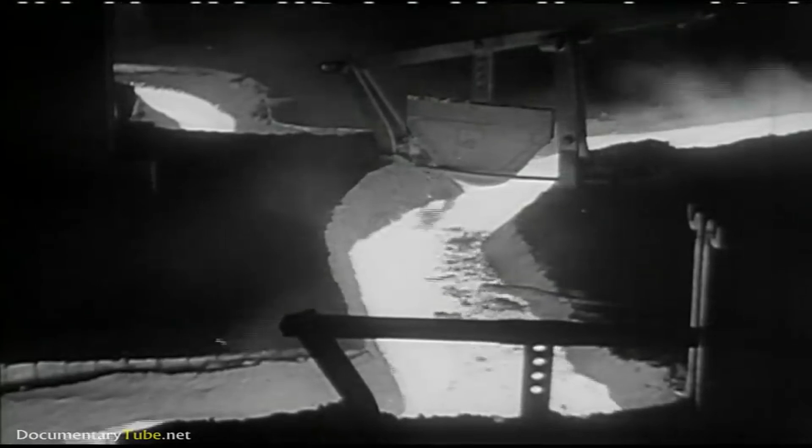Simultaneously and working in perfect coordination, other Chrysler men planned the layout of the arsenal building itself. Expending more than $200,000 of its own money for planning even before the go-ahead signal was given, Chrysler Corporation pushed forward this national defense job with all possible speed.

On August 15th, it was authorized to construct a $20 million tank arsenal and to build 31-ton tanks. A job had to be done, and Chrysler Corporation was determined to do it. In less than a month, first ground was broken for the arsenal.

Huge steam shovels, like fabulous monsters foraging for food, dug out massive chunks of earth to make way for deep foundations. Vast amounts of construction equipment, tractors, cranes, and graders arrived, and the excavations took on an appearance resembling a busy mining camp. Concrete, and still more concrete.

51,000 tons, most of it poured at temperatures near zero, went into the foundations of the arsenal itself, and into the especially deep foundations for extra heavy machinery, and into large floor areas and roadbeds for the railroad sidings which were to run into the factory.

Meanwhile, behind locked doors, preparation for tank production went forward. Army officers and Chrysler men, experts all, worked side by side to produce armament for America's defense. Working untiringly, production engineers designed the jigs, dies, tools, and machinery necessary for mass production. Other experts worked night and day to plan the most efficient plant layout. Uncle Sam had asked for action, and action he got.

Steel construction followed close on the heels of the foundation work. Fighting now against the bitter cold of a Midwestern winter, as well as time, hearts warmed to see the first steel upright swing into position, and willing hands quickly bolted it solidly into place. With the first steel uprights pointing slim, rigid fingers skyward, steel construction went forward at a record pace.

Steel, more than 13 million pounds of it. More than 20,000 large pieces went into the construction of the vast plant.

Ah, what's this? A bottleneck? We don't envy you the job of sorting those out, brother.

Cold, snow, ice, rain, nothing deterred the building of the immense structure.

Men, ankle and sometimes almost knee-deep in mud, worked with determination. Trucks plowed through to their destination, delivering their vital cargoes of supplies and materials.

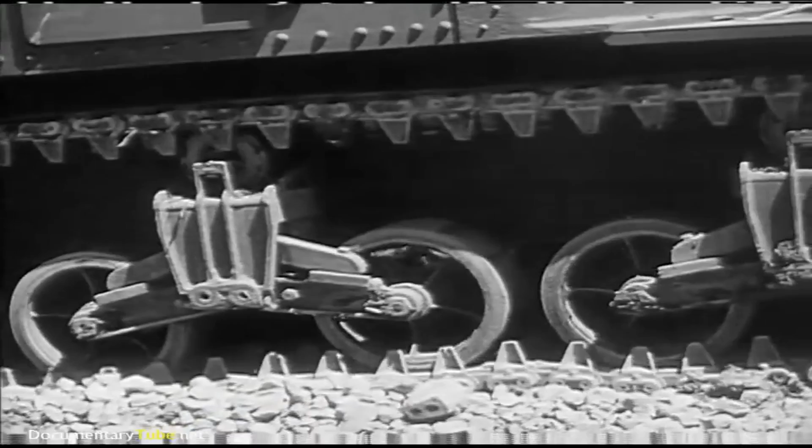Then came a red-letter day. In the presence of Major General E.B. Gregory, Quartermaster General of the United States Army, the official flag was presented and raised over the tank arsenal. Then on strict schedule, carloads of production tools and new machinery began to arrive at the arsenal, ready for immediate installation. More men, more materials, and still more speed. Bricks and mortar, steel and glass, and the vast skeleton of a building began to gain a more solid appearance.

With wiring completed inside the plant, men hurried to finish the flooring, while high above them, fellow workers rushed to weatherproof the roof. Another red-letter day marked the one-third completion of the arsenal. Ever mindful of their fight against time, production engineers partitioned off this one-third. Then, with the arsenal steel construction still to be completed, and with only this part of the interior temporarily heated by means of a locomotive, building of the first sample tanks went forward in earnest, and Uncle Sam's defense program began to assume definite, more tangible form.

Meanwhile, work on the arsenal itself continued at a rapid pace, while day by day, hour after hour, new machinery was moved in, according to a carefully coordinated plan, even as hundreds of designers, draftsmen, and engineers supervised the building and installation of more machinery for mass tank production from assembly lines of defense. Time was precious, and certainly none was wasted here. Exactly as planned, every huge milling machine, each giant multiple drill press, every single piece of machinery, large and small, had its predetermined foundation and location in the arsenal's layout.

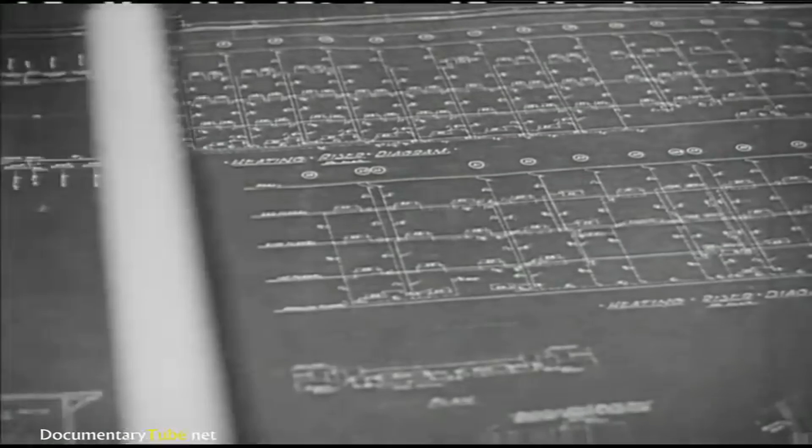Fortunately for America, the most important assignments in its defense program were taken over by industries skilled and experienced in scientific research. Moving at top speed, the National Defense Program benefited by the wealth of experience gained by America's number one industry over a period of years. The engineering and production skill that had given America constantly better and better automobiles and trucks for less and less money went into the planning and building of these giant tanks for America's defense. No time was lost in training skilled workmen in the jobs they were to do, as preparations for quantity production began to assume even larger proportions.

With the mass moving in of giants of modern industrial production came a myriad of small machines, literally hundreds of them, all tagged and clearly marked, each with its own important place in production, each with its vital job to do. More than 8,000 specially designed tools and gauges and fixtures were also to be installed before the arsenal would be completely equipped. The arsenal became just that in the truest sense of the word.

Strictest official secrecy was enforced. Incoming and outgoing men and vehicles were carefully checked and inspected. The race to produce the tanks, way ahead of schedule, was well underway. The full power of private competitive industry, its manpower, its resources, its facilities, was again proving its worth when turned to the job of America's defense.

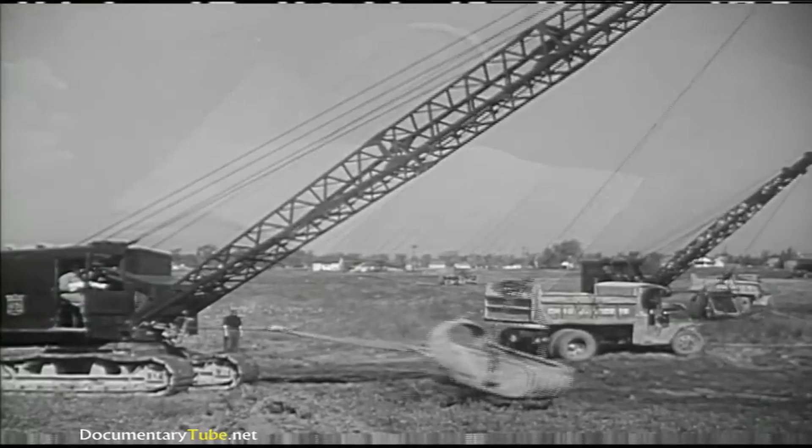Pride of accomplishment surged in the minds and hearts of the onlookers as the 31-ton giant was put through its paces. Here was a giant weapon for streamlined modern warfare. Swiftly moving walls of tough, bullet-resisting steel, able to move over difficult terrain at better than 25 miles an hour. Mobile, flexible, fast.

Military experts acclaimed these American Army tanks better than any similar mechanized war equipment, a mighty safeguard for our nation. General Wesson and President K.T. Keller of Chrysler Corporation watched the mighty moving fortress as, with cannon booming and machine guns chattering, fully ready for frontline action, nothing hindered its progress.

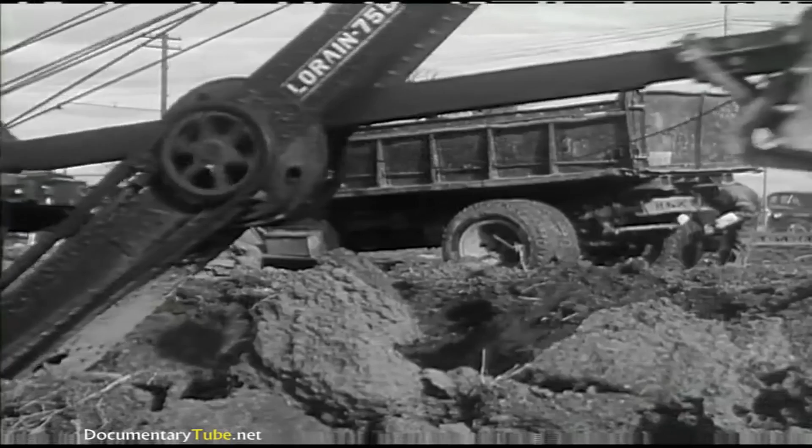Climax of the day was the unheralded appearance of the second tank, which had been completed that very day. American men and American industry had carried out the Army's order of the day and had taken a major step toward arming the country for defense.

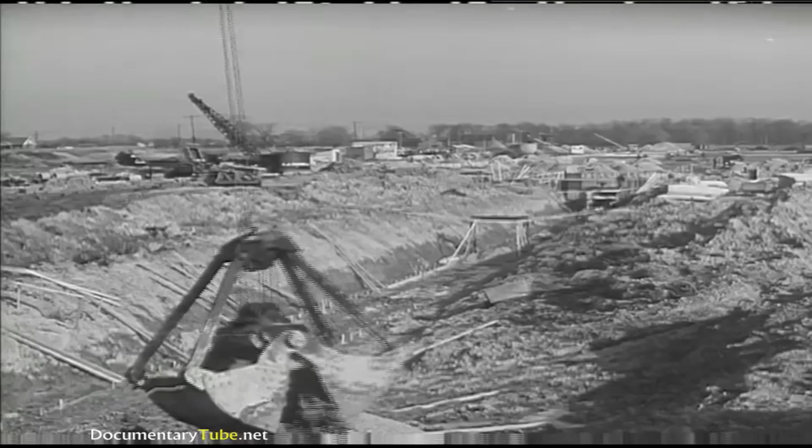This great defense effort began to reap the harvest of its labors as production tanks filled the first assembly line. Then the second. Relentlessly rolling, the third assembly line was filled, and mass production was on the way. All hands turned to the job of building tanks in volume.

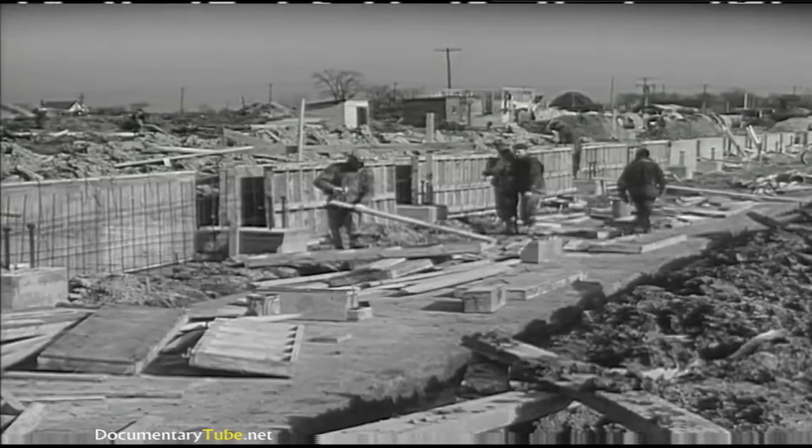Smooth American business-like coordination and cooperation is the keynote in production as it was in preparation. Free, patriotic cooperation, the American way.

Quantities of all manner of parts, mighty steel armor plate, cast steel forgings of varying sizes and designs, mighty 2-ton turrets, each a veritable fortress in itself, stand ready to feed these assembly lines of defense. From the largest tank part down to the smallest, each is ready to do its job in Uncle Sam's new armed strength.

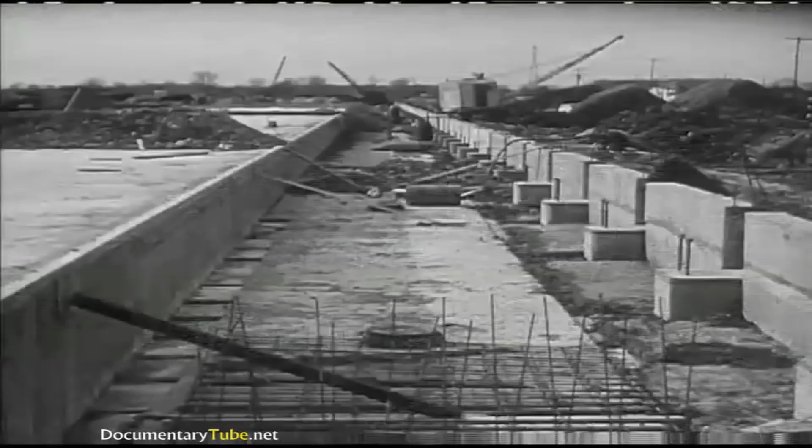All materials brought together from more than 700 factories located in 130 communities throughout the country are carefully checked to specifications for strength, measurements, and weight. For Uncle Sam must take no chances.

Veteran expert machinists mill contact surfaces to hair-splitting specifications. Giant multiple drills bore through the toughest metal. Row upon row of intricate, specially designed machinery manufacture and prepare the 35,000 or more individual parts that go into each land dreadnought. Welding, milling, riveting, measuring and remeasuring vital parts to hair-splitting dimensions.

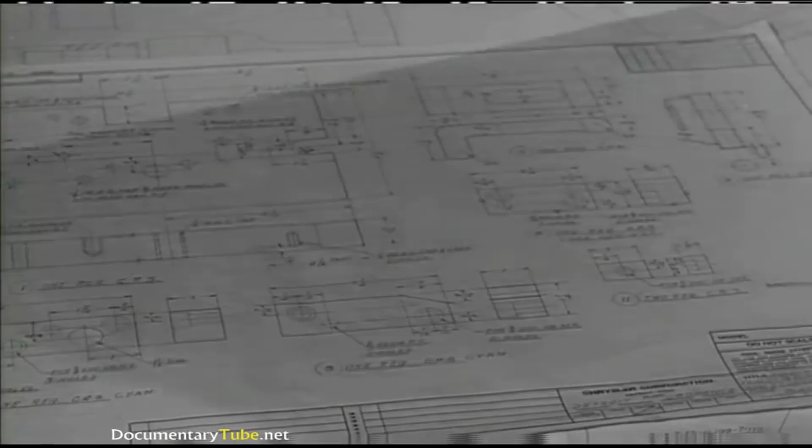Then, at the beginning of the main assembly line, the hull sub-assembly begins to take on a vaguely recognizable shape. Rubber cushion wheels are set into place, ready to run onto caterpillar treads at the end of the line. On down the line, more and more parts and inner fittings are added until the tank is ready for the paint oven and its first coat of United States Army olive green.

Next comes the big radial motor capable of pushing this land battleship at a speed of 25 miles per hour. The 3,600-pound swivel gun turret is swung into position, its ruggedness seeming to hurl defiance at any who might challenge it. Then the vital caterpillar tread is added.

With armament complete, the tank's guns, including the formidable 75mm cannon, are mounted in place. And Uncle Sam's answer to all challengers is ready for a 75-mile test before delivery to the Army, complete and ready to defend America.

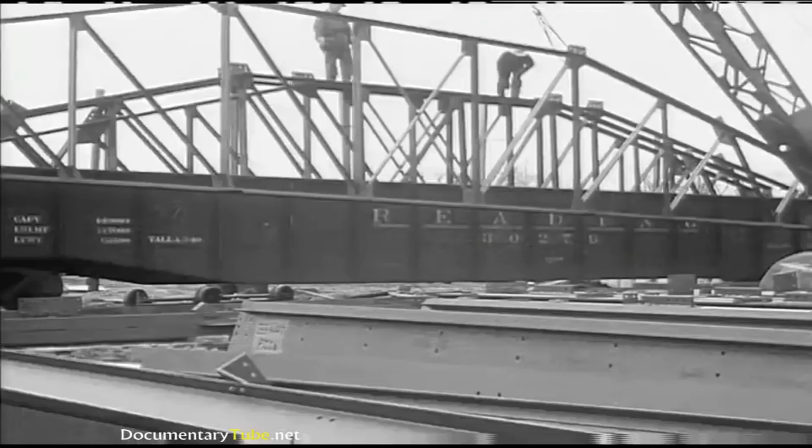Thus, from these assembly lines of defense, roll defenders of America in ever-increasing numbers. Chrysler Corporation is proud of this record in tank production, but it is only one phase of its part in the vast national defense program.

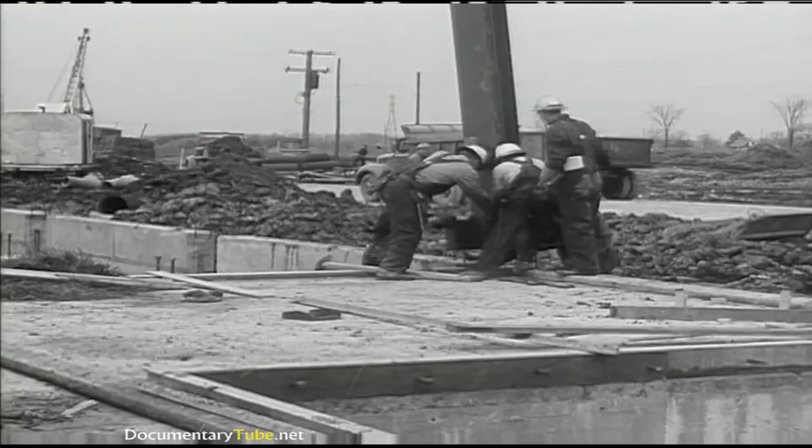Every division of Chrysler Corporation, Chrysler, DeSoto, Dodge, and Plymouth, is also doing its important jobs for first-line defense. Special Army trucks are coming off the lines at the Dodge truck plant at the rate of more than 250 every working day, and have been for many months.

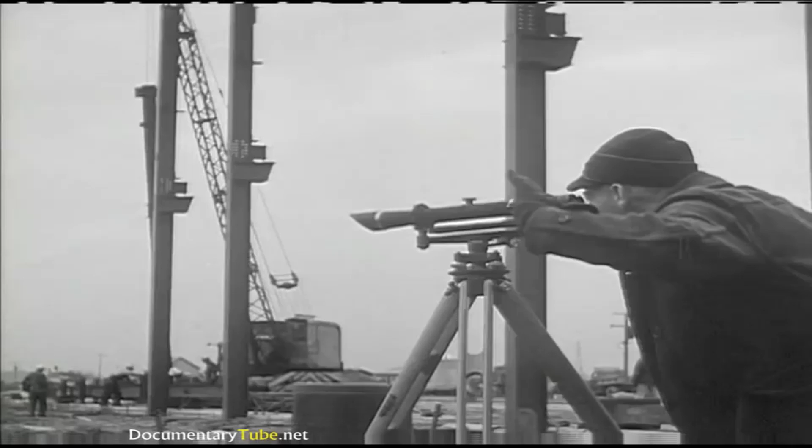Aluminum alloy forgings for defense work from the new Dodge Forge plant. Parts for nose and center section fuselages for Martin medium bombers from Plymouth and all other Chrysler Corporation divisions. Field kitchens, propeller balancers, tent heaters, furnaces, and refrigerator compressors for Army cantonments from the Airtemp plant in Dayton, Ohio. Parts for 40mm rapid-fire Bofors anti-aircraft guns from the Chrysler, the DeSoto, and 7 other plants in Detroit and New Castle, Indiana.

And in Chrysler Corporation's famous engineering laboratories, development work progresses on a new 2,000 horsepower airplane engine, new military truck designs, airplane landing gears, multiple engine power plants, and many other engineering assignments for the United States Army and Navy. In addition, orders have been filled for fuses which go into the noses of airplane bombs, for 3-inch shells, and for 3-inch cartridge cases.

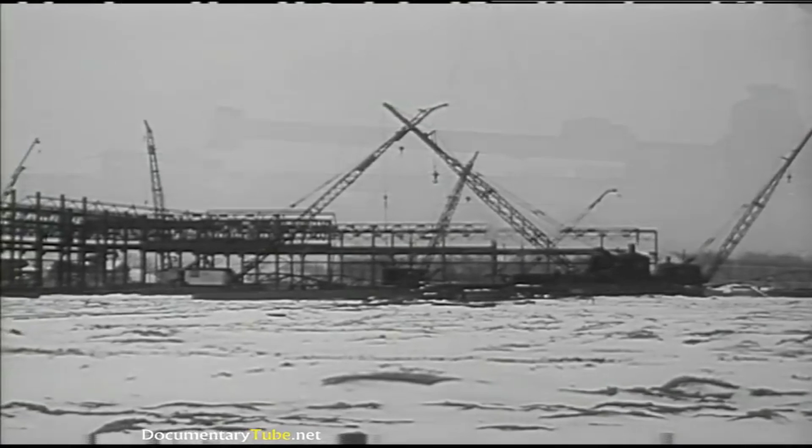Oilite bearings and other powdered metal parts for various defense items. These and many other Chrysler Corporation activities are examples of how the wheels of the automobile industry, symbolic of all private competitive enterprise, turn together in unison to supply the nation's requirements. Thus do the brains, hands, and hearts of free American men work to carry out the Army's and the Navy's orders of the day on assembly lines of defense.